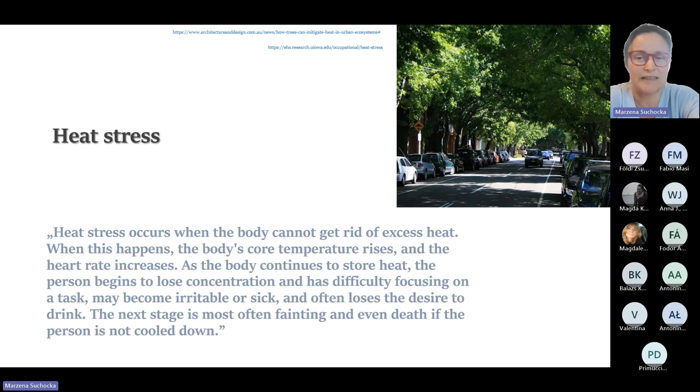Okay, it's working. Heat stress, we experience it more often than in the past. It has some consequences. It can make us weaker. It can make us ill. It can even cause death. It happens because of heat waves in cities.

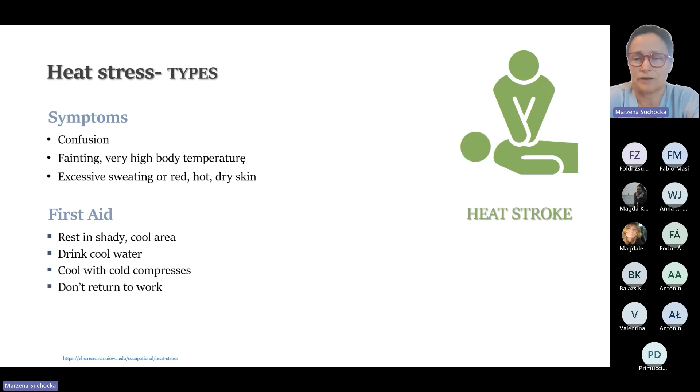The symptoms are from very weak, like just heat rash, and we need to relax, and later we can come back to work. We can have heat cramps or heat exhaustion, but when we have heat exhaustion, it's more serious, and we shouldn't return to work. It's a longer time to recover. The same about heat stroke, and heat stroke could be even a threat of death. So there is a problem.

And the problem is economical, social. It's a problem of our health. And there is some information that could demonstrate the problem. We know that workers have full capabilities at work at 23 degrees Celsius, and their ability to work will be less with higher temperatures. So even when we have 30 degrees, it's like 70% or even less.

And we know that in the shade of trees it will be cooler. I will deliver a lot of details, but for now, just why it happens, how it happens. Trees need energy for photosynthesis. So only 10 to 30% of the summer sun energy is heating the ground. It means that the places close to trees are just cooler.

And there are a lot of studies, but just one example. Walls standing in the shade of the trees could be on average even 20 degrees Celsius cooler.

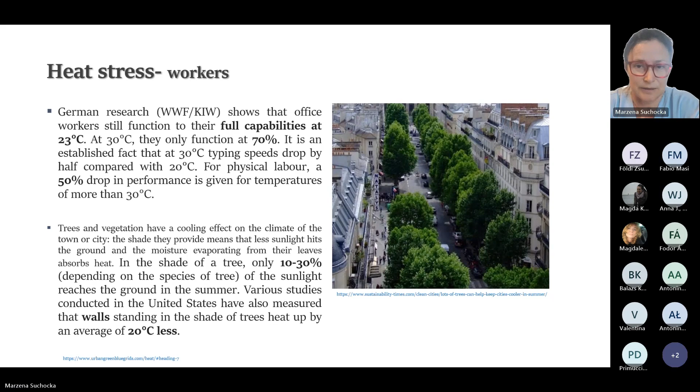What about inconvenience in the city? There are some facts that we are afraid of. We don't need to take Beijing as an example, but we have the same problem in Warsaw, and we are not the hottest city in Europe. But for example, Beijing has 14 additional hot nights even in rural areas, and in the urban areas, it's 26 additional hot nights. And the expectations are that it will be even more.

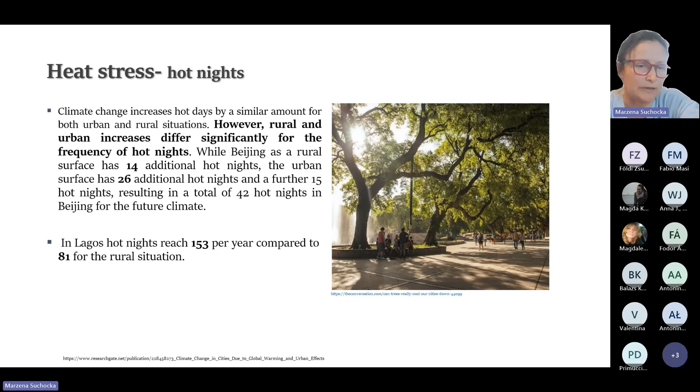From a very long time ago, there were some attempts to mitigate heat island. In Atlanta, when the Olympic Games were planned, there was a problem of energy need for cooling. Organizers were afraid that there would not be enough energy to cool the city for sportsmen.

To prepare the games, they planted 5,000 large trees, trunk diameter like 30 centimeters, and 60,000 smaller ones, trunk diameter like 7 centimeters, and they reduced the heat island by 30%. So it was a real benefit for the city, and that allowed them to organize the games. So trees and vegetation can mitigate air temperature, and I will tell you about that.

The problem is bigger when we are going deeper into the city center. Rural areas are still cooler, but city centers, dense, built of concrete, are really hot. So there is a relation between greenery or lack of greenery and temperature through the day and through the night. So what we are doing now is trying to bring natural processes into the concrete centers of the cities. And I will give you a lot of details about that.

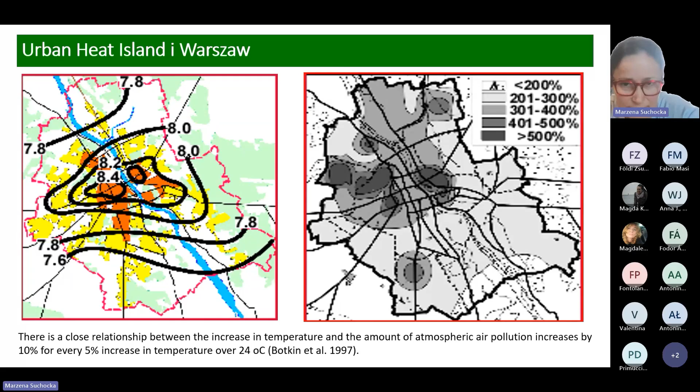And atmospheric air pollution increases by 10% for every 5% increase in temperature over 24 Celsius degrees. So there is strict correlation. From another side, when we are analyzing tree canopy cover, it is a nice factor. We'll talk about it later.

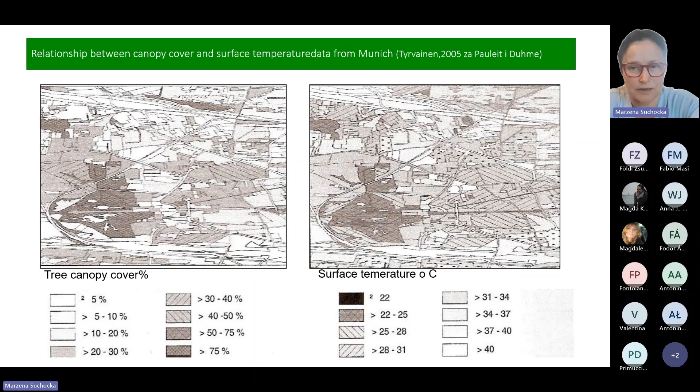And when we are analyzing surface temperature, as you see, there is again straight correlation. So more tree canopy cover means lower temperatures. Even on that easy study, we can see that. How it works: trees are taking temperature, and when we have a temperature like 30 degrees, we will have 40, even 50 degrees on pavements, and we can have thermal comfort just close to trees.

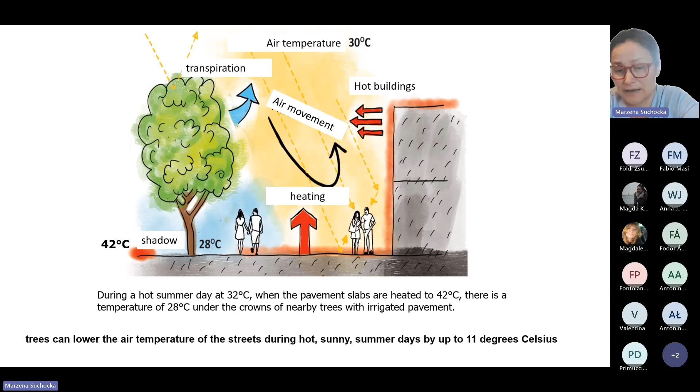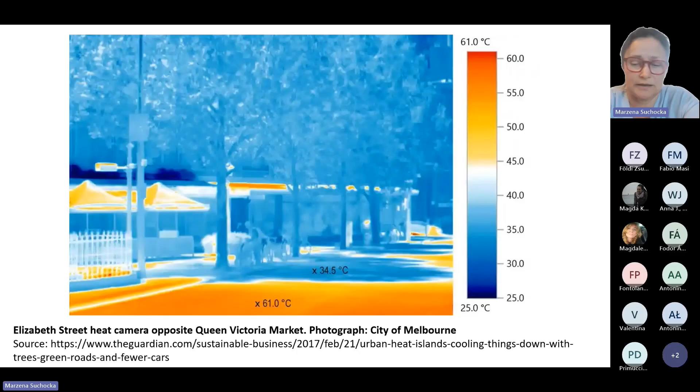And I will show you a lot of examples in the second presentation, how it works, how much it works, which kind of structure, which kind of species are working better. So the difference between close to trees and outside of the trees is 11 Celsius degrees, but it could be much more. And I'm sure more often it's just much more. That is a Melbourne example, where we can see that it is even 20, 30 degrees. So lower temperature in the shadow, higher temperature on the pavements.

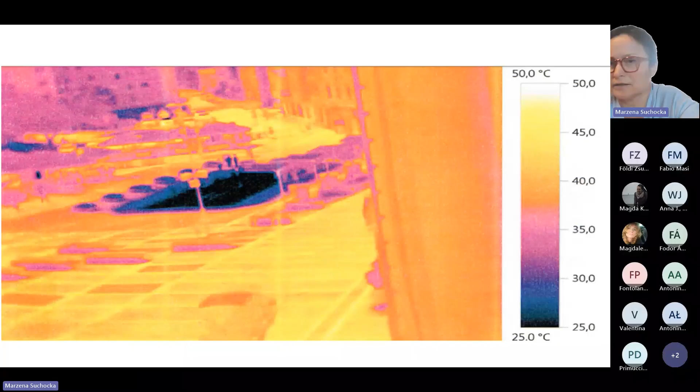That is a normal photo, that is a photo in a thermal camera, and you even see the color of the pavement. So darker pavements are just warmer. That is important. Our little trees in the pots, that by the way are standing in a place where they can't survive, it's really hard site condition for those trees, but those little trees could decrease the temperature like 20 or 30 degrees and bring thermal comfort.

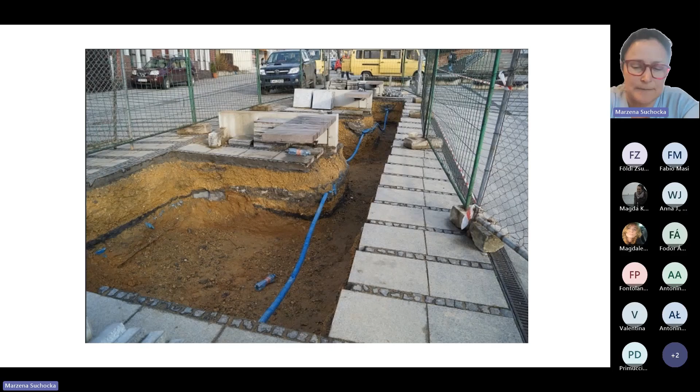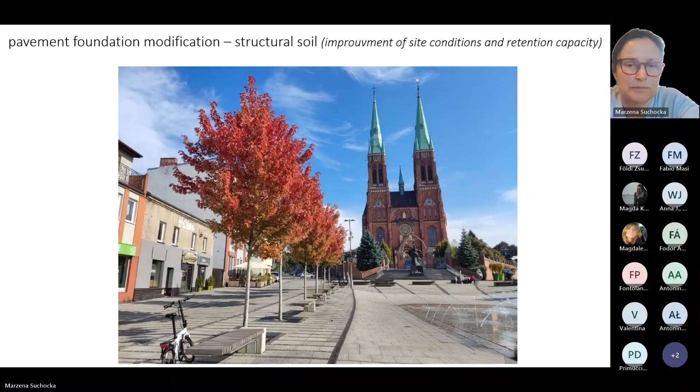That's why we just started to improve the situation. That's what you see here. It's a rebuilding of the pavement. We used structural soil just to capture water, just to organize the place for roots of trees, and we planted trees. It's hard site condition still for trees, but that improvement of the site, I mean structural soil, is allowing the plants to grow, to be healthy, as you see, and that investment was something like 8-10 years ago, and you see the result now.

Still, they are vital, and there is a plan to make more trees to enlarge the plantings, because that improved the situation. Not only thermal comfort, but wind, pollution, and water management. So still we have all functions together. So it's not only one function. We are not only proposing thermal comfort for city dwellers. No, it's a lot of functions at the same time.

Again, some picture that is colored in the autumn, because they are just green trees, and in the autumn they are just like a miracle. People from the city loved it. I still have pictures. That year they look like that. Still very healthy, and they are just working for people.

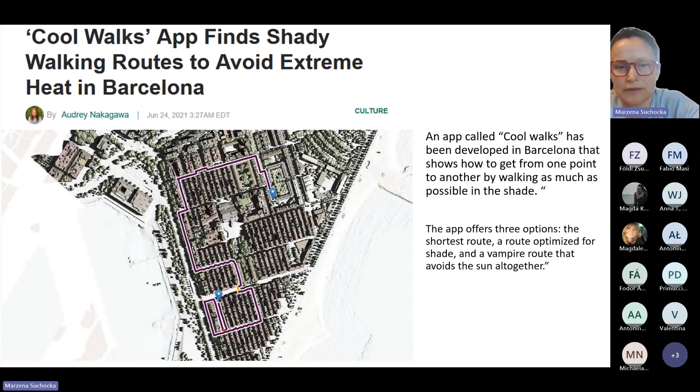So green infrastructure started to be perceived in a different way than before. Before, ecosystem services like aesthetics were the most important. Now we need shadow. We need to improve thermal comfort. We need to manage water. So different needs are priorities.

People were protesting, and in the time of the guarantee, when you finish the project, everything was rebuilt, and big trees were planted, because those little trees are like a temporary plant for 1 year, for 2 years, maybe for 3 years. It's not the plant that will bring us ecosystem services in hundreds of years. That's why people protested, and it was changed immediately.

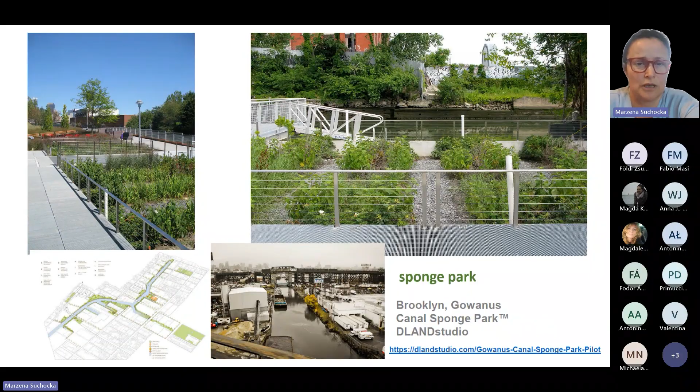So now we are talking about functions of blue-green infrastructure. We are organizing sponge parks. So there is a park, of course it's beautiful as well, but it has functions here. The main function is just retention. We are bringing nature into cities, even temporarily, just to bring ecosystem services.

You see here different layers of vegetation. Later we'll talk about how different layers are more effective in cooling, but in the rest of ecosystem services as well. We have a trend to organize habitat gardens. So we are going in that more natural direction. Natural sets of plants that usually grow together, and so we are adjusting plants to the site conditions. So of course they are beautiful because they should be beautiful.

This is a very important function for people, but they are healthy, they are fast growing, they are long lasting, and they are bringing benefits, or flower meadows. So different kinds of vegetation, and we are talking about retention capacity of flower meadows and so on.

There is a problem of leaves, and I don't know what it is in different countries, but I see a wave of compulsive behaviors. People are trying to clean everything around, and they are fighting with leaves, and we need them. It's called organic matter. It's food for biodiversity in the soil. Without biodiversity in the soil, we are not able to, for example, keep newly planted trees, because that biodiversity is supporting newly planted trees in each time of stress.

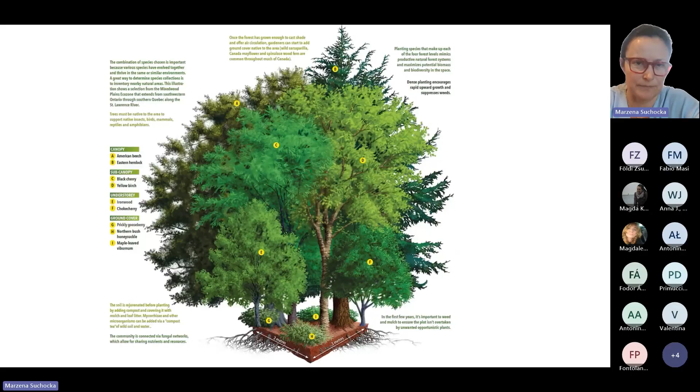Even in the city, it was just a positive social event. Here you have some information, because information is very important. We need to tell people that forest is important, leaves are important, soil is important. We can't damage the tree, we can't damage the soil, because there are millions of organisms. So we are just bringing functions.

The High Line is a nice example of how the functions, the improvement of well-being, were organized by that linear park, and it's really biodiverse. Now it is an icon, a symbol of New York, and people come from all around the world just to see that miracle in a place that was totally damaged, totally poor, without ecosystem services, so the temperatures were really high.

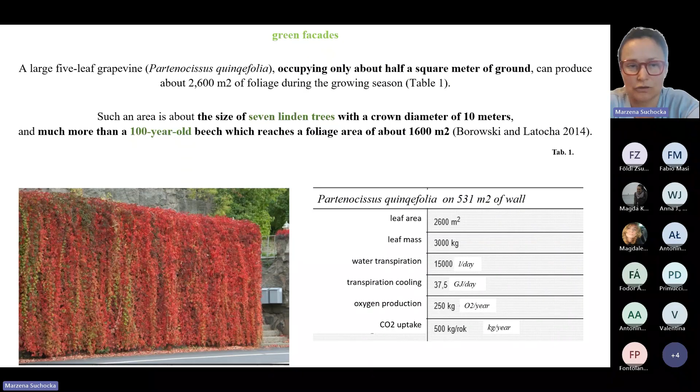So 500 square meters of green wall made of Parthenocissus quinquefolia has water transpiration capacity and transpiration cooling efficiency that we demonstrate in numbers. That is important: we need numbers to put the work of green infrastructure into calculations.

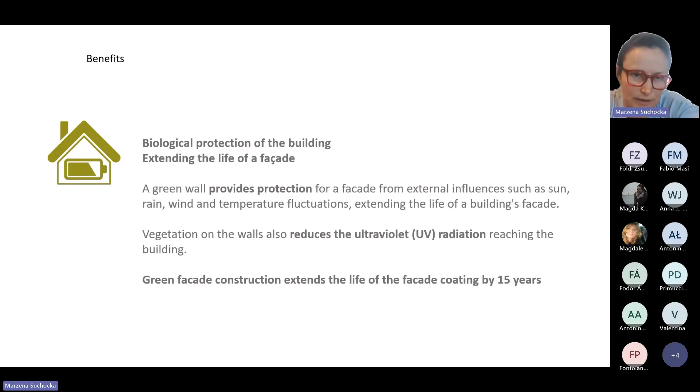The same wall will improve the quality of the wall. The green facade construction lifetime will be extended by 15 years because it takes energy and the extremes are flatter, not so hot and not so cold. That's why the facade will live longer. The same wall will absorb noise; some research says something like 40% of sounds, a reduction of up to 8 decibels.

And the same wall will bring cooling benefits, because 50% of the sunlight is absorbed and 30% is reflected, so air conditioning runs 30% less intensively. That means energy savings, and the average temperature effect is about 3 degrees Celsius, outside and inside: in winter the inside temperature is higher, in summer lower. So it brings energy savings on cooling and heating the building.

Again, I will show you some examples. The United States calculates how the urban forest works for stormwater runoff, and the calculation is a reduction of 2 to 7%. They calculated that investing in green infrastructure is 3 to 6 times more effective in managing stormwater per $1,000 than conventional methods.

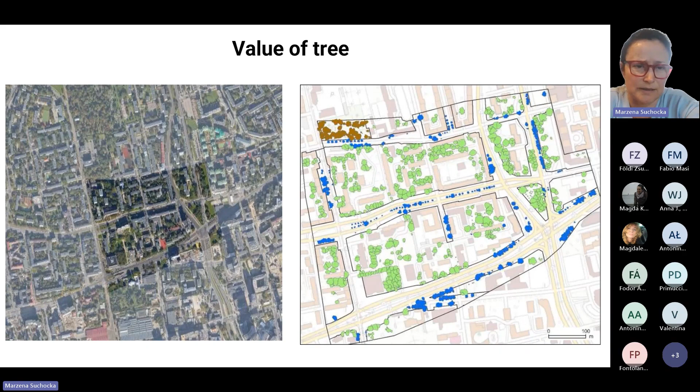We just analyzed, in that case, the air, so all the ecosystem services that are connected with air cleaning, and we calculated them. It's an example because, as I will tell you later, the benefits could be calculated from the point of cooling, but it appeared that 1,300 trees are working for the city, and the value of that work is almost 6,000 euro. And of course, we can demonstrate in the details, but even when we look at PM 2.5, it is worth almost 500 euro per year, but it is almost 10 kilos of PM 2.5.

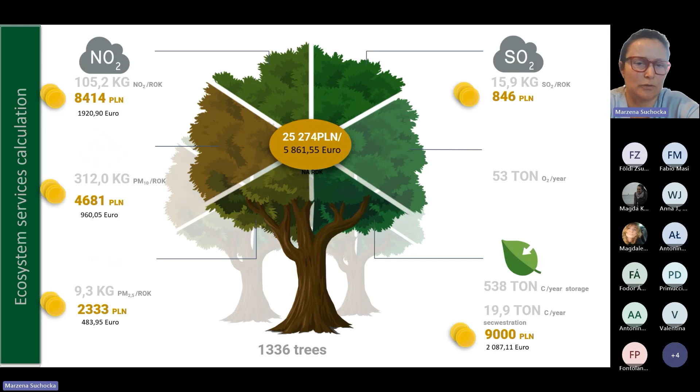It's one of the pollutants that is really damaging for us, and everything is connected. So the trees not only clean the air, but they are also cooling the district, that area. Of course, the higher the tree is, the bigger the tree is, the higher is the value of ecosystem services. And we made here some estimations, like an average, that is really useful later for other estimations or analysis. It could be estimated for the whole city. We just need to have the data.

So our most efficient tree was a populus, and it was something like 16 euro per year, because usually it's just per year work, so each year. But we calculated replacement value as well. I just want to show you the tools that we are using for urban forest management, urban greenery management. One is, as I told before, ecosystem services, so the value of the work each year, which is, as you see, the highest for our tree. It was something like 16 euro. But we also analyzed replacement value.

And those 1,300 trees, it was something like more than 2 million euro value. And it's the value of an asset of the city, yeah? So it's a value like buildings, like roads. Trees are a value, and we can calculate it. Replacement value is perfect for that. And just to show an example, our populus, the most efficient tree. By the way, people don't respect the populus genus. For them it's dangerous and doesn't have value, and that one was the most efficient.

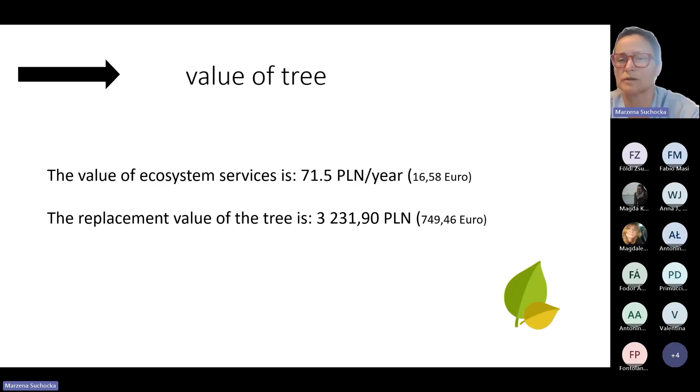Even when we are demonstrating how much it works, how many kilograms of pollutants it's capturing, it's impressive, because what kind of method would we use to have that efficiency, yeah? And we can calculate the ecosystem services value, it's 16 euro in that case, or the replacement value, which is almost 750 euro. So different levels of monetary value, but both of them are important. So we know the value of our fabric, and we know the value of ecosystem services it brings each year. That is just cleaning the pollutants. The whole value with energy savings and water management is like 3 times higher for the tree, more or less.

So we are able in that way to prepare some calculations and have information for discussion. What is worth it, what is not worth it, how we can invest, because each tree is an investment. We are planting it and the value will be higher. That is the opposite of gray infrastructure. When you construct gray infrastructure, the value next year will be lower, and our tree value is higher. So we can calculate the ecosystem services value. It was almost 6,000 euro in that case. We can calculate replacement value. In the case of those 1,300 trees, it was more than 2 million euro. And we have data for discussion.

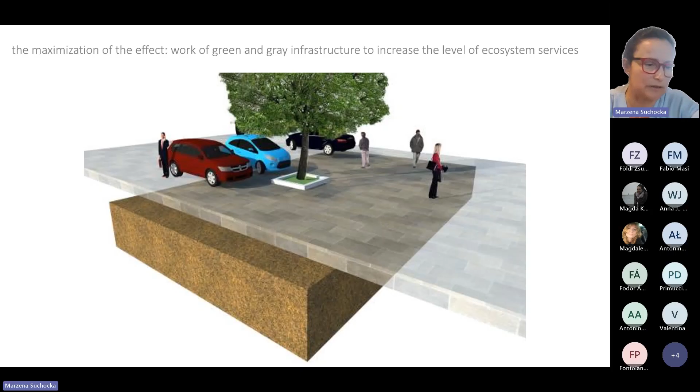So what do we do to improve the quality of green infrastructure? City centers are really dense and covered with concrete, and that concrete must stay. Of course, some of it we can replace with green infrastructure, but some of it is not possible. And that's why we are trying to modify the subgrade of the pavements. In that way, we can have all the pavements, roads, or parking lots that we need, and the green infrastructure that we desperately need now, because if not, we will have a problem. That's why, to not disturb trees, not to damage or cut off trees, we are putting basements under the roads, because those roots will work for us. They'll take water, will transpire, and that transpiration will cool our cities.

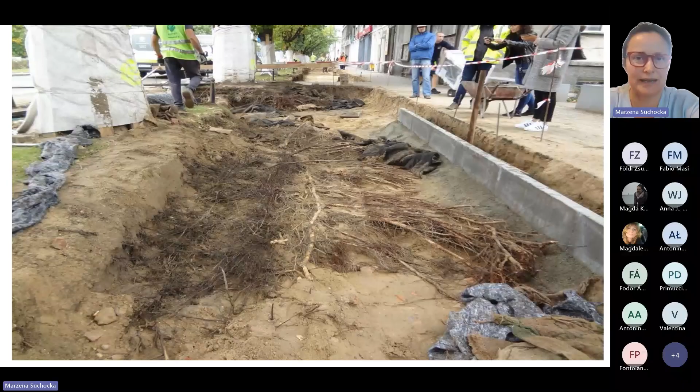So we are combining gray infrastructure as a supporter of green infrastructure. That is something different, because usually gray infrastructure was damaging green infrastructure. That's the way to improve the site conditions of trees, and to allow our investment, an investment like a tree, to live hundreds of years.

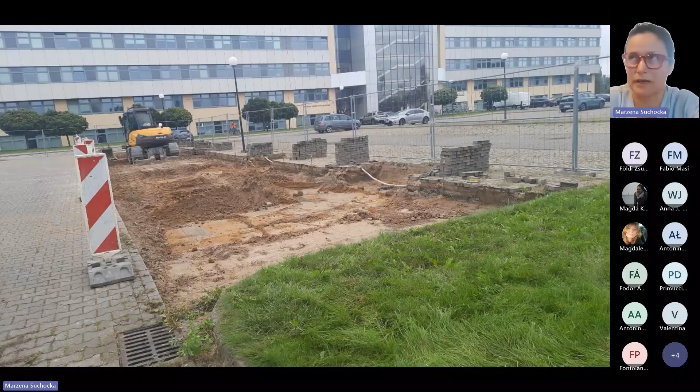That is a place where we have an experimental plot, just in front of my building at the university. We are just examining, collecting data to calculate the efficiency of trees. That is just the preparation of our experimental plot.

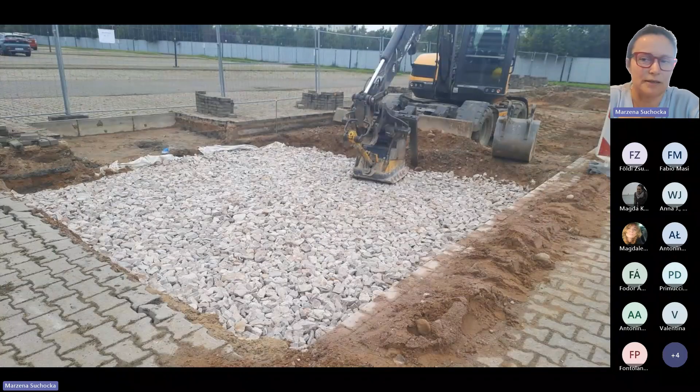You have 3 pits here, and they're like 2 meters by 2 meters, and you have 2 parking lots with structural soil. And it's 5 by 5, so 25 square meters. So both of them, it's almost 13 meters of space for roots. It's the space where we are capturing water, because the subgrade could even be filled with water. We are delivering water from the rain and oxygen to the roots by that little orange device.

And we have a place where ecosystem services came back, and that is connected with concrete. Here we have porous concrete because we wanted to check how it works, and we are just looking for new possibilities. One function that is important for porous pavements is the function of cleaning. So PM 2.5 or 10 go in, and they can be taken by the biodiversity in the subgrade of the pavement. That is the new approach that we are trying to propose in the hardest sites, the most concrete sites, like our parking lots, as you see.

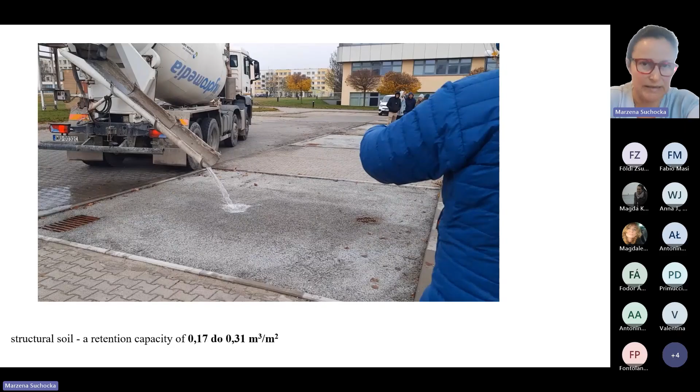And that is something that I want to show you, because we put 2 cubic meters into 2 parking lots, and we were able to manage that water. So it was the infiltration process, it was evapotranspiration, it was transpiration by roots. It will be higher in the future. And now we are just measuring that. And of course, besides the capacity of the subgrade for water management and the potential of cooling, we have the work of our trees. So we can add both things together.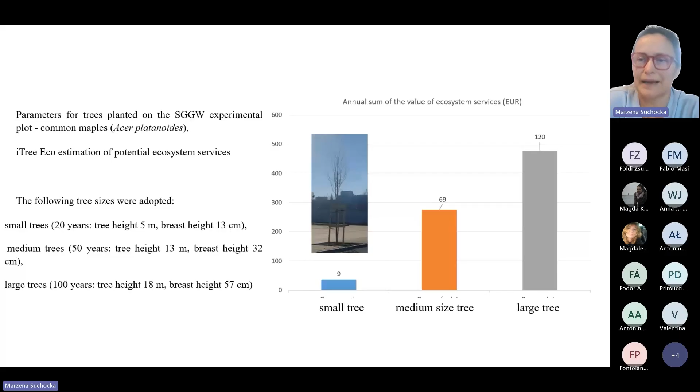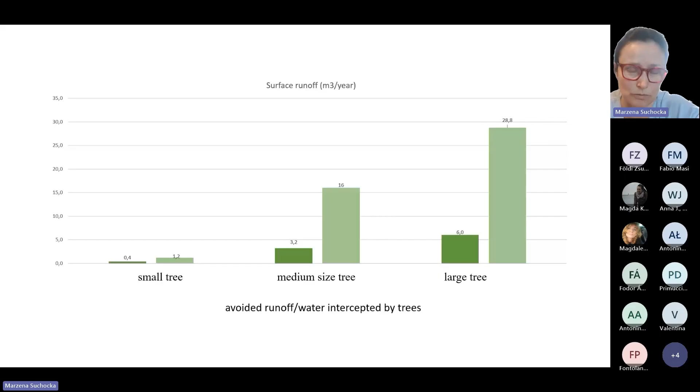Only 3, and additionally, we have the capacity of our grey infrastructure, and being large, because it has nice site conditions, it will be more than 30 cubic meters to capture, to manage. So that will be transpirated, evapotranspirated, that will infiltrate. It will make that place cooler. We suspect that there will be huge differences.

That's why all those dots are sensors. We are just collecting data to know more about heat island mitigation potential, about the differences between our pavement and normal pavement, about the efficiency of trees, the transpiration of trees. We'll use porometers to tell the difference between trees that have access to water, because the structural soil is a source of water for them, and the trees in tree pits, like 2 meters by 2 meters.

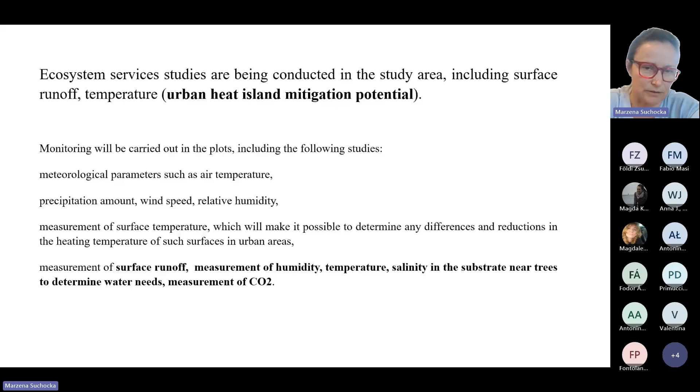So I hope next year I will demonstrate more interesting data about our research. And that is just temperature. So we can see differences between normal pavement and our pavement with structural soil, but we need a little bit more time to demonstrate them. We just need a longer time to demonstrate the results of our study.

So we can use non-typical tools to plant trees in places where they normally, in a standard way, can't survive. It's too hot for them, it's too dry for them, it's just extreme site conditions. So that's why we are using gray infrastructure that could be used for transportation, because it has enough parameters that are good for all kinds of traffic, even heavy traffic.

We have in that subgrade a retention capacity of up to 0.31 cubic meters per square meter of that solution, and we just need to have that modification, because it is improving site conditions for newly planted trees. That's why they will grow into big trees, and a big tree is an efficient tree. We need at least medium-sized trees, because they are working visibly. It's the level of ecosystem services that we need. Of course, the best level is the work of big trees.

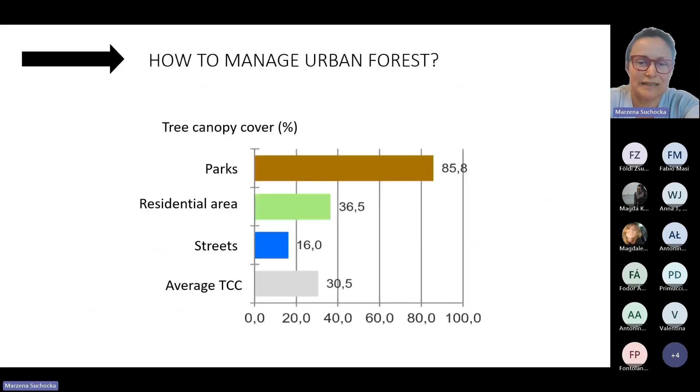And 30% is the level that is enough to maintain thermal comfort, to maintain water management, to slow down runoff. So we need a minimum of 30%. But not only for that, there are thousands of studies, and a tree canopy cover of 30 or 33% is demonstrated as the canopy cover that significantly reduces stress, anxiety, and depression.

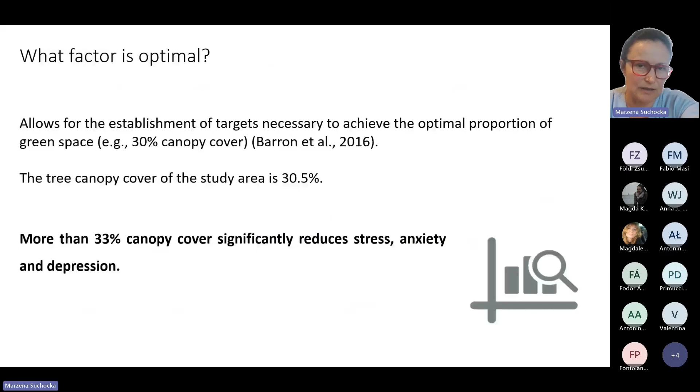So we are talking about heat islands, but the rest, 19 ecosystem services, could be delivered with tree canopy cover of at least 30%. That's why the 3-30-300 rule appeared. That is a discussion with a previous rule by Dr. Frank Santamour, the 10-20-30 rule for biodiversity in the urban forest stand.

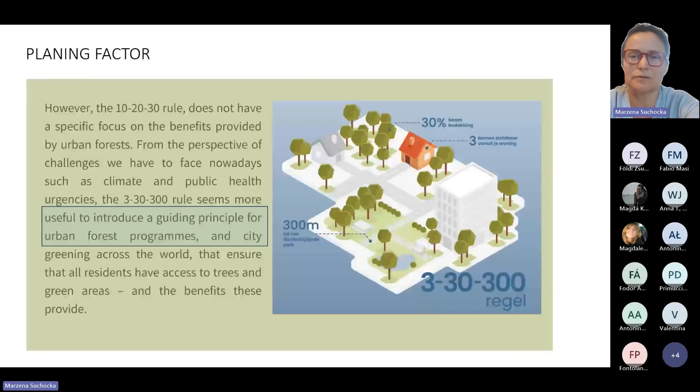And the researchers went further, and what it means is that the functions in the city, the ecosystem services, are at a satisfying level when we can see three trees from the window, when we have at least 30% of tree canopy cover in the neighborhood, and 300 meters to the nearest park or green space. And that is a nice rule because it's really complex. Each number is backed by a lot of studies confirming that that level of saturation with green infrastructure is the minimum that is working. I will demonstrate a lot of examples of that later.

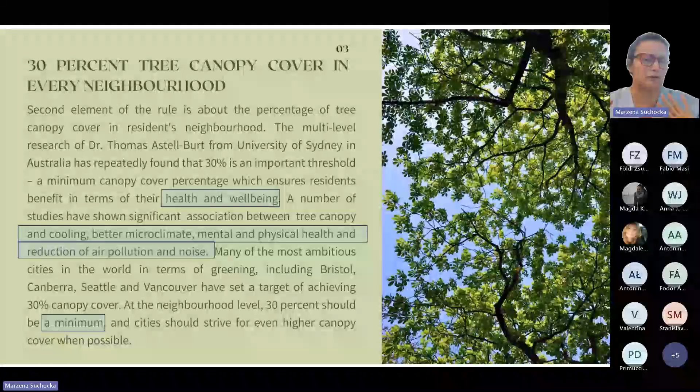So with the three trees, it is better when we have fewer large-size trees than a large number of smaller ones. Of course it could be more, but again, the size has a meaning. About 30%: when there is 30% or more, it's a condition to maintain the well-being of city dwellers in a whole range of ecosystem services. It's physical health, reduction of air pollution, cooling, microclimate, and 30% is the minimum level. It's specific, like a minimum level.

And 300 is the distance to the nearest green area with good quality. What does good quality mean? It could be a size of at least 1 hectare, because that area is efficient, but a size of half a hectare should be set as a minimum. Of course, it's good when there is a system of those kinds of green areas to deliver to city dwellers. So whole cities are checking how it works in their area.

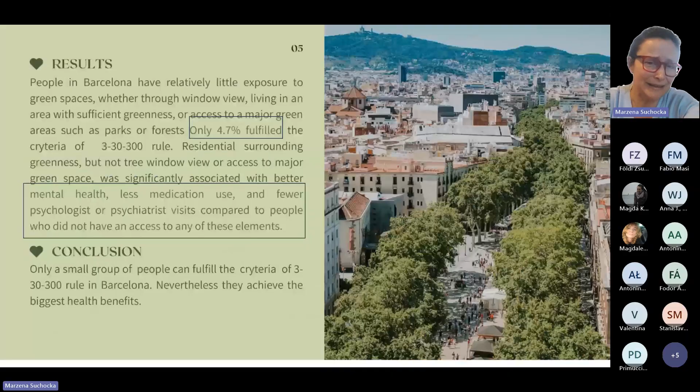Barcelona checked how many people are living in those conditions, and only almost 5% of city dwellers fulfilled all 3 criteria of that rule. And they have the best mental health, they used less medication, they visited doctors less, so their health was better in comparison to the other groups.

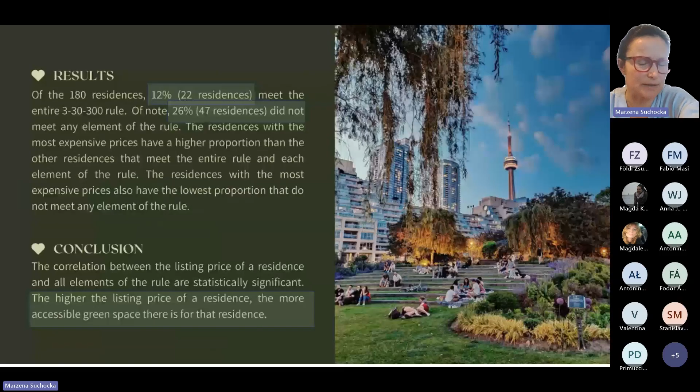About Toronto. Toronto checked the prices of buildings, of flats, and checked if the flats, the places for living that fulfilled our rule, are the most expensive, and of course they confirmed that. In Toronto, 12% live in places where the 3 criteria are fulfilled, but 26% did not meet any element of that rule. And that is a question of social justice, yeah. Just access to well-being, to the places with the best way of life.

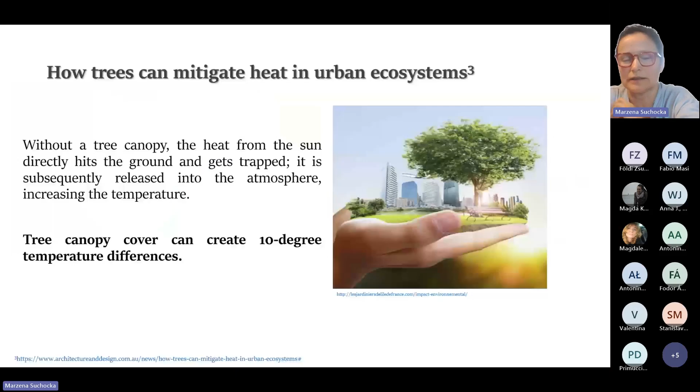If we analyze which criteria were fulfilled, which not, in which situation, that is a nice tool for management. We know where there is a lack of good quality green infrastructure, which districts, which streets, and we can improve, we can manage, we can deliver good living conditions. So this can mitigate heat in the urban ecosystem. Tree canopy cover can create 10-degree temperature differences. I will show you detailed analysis to prove that, and how much greenery is enough.

So even a little improvement, like when we improve tree canopy cover from 20% to 30%, the city that checked it avoided 3% of total mortality. But even a 5% increase in tree canopy cover brings an important result, like 300 fewer deaths. So even in that case we can analyze how it works, because when you have heat, especially heat waves, there are peaks of mortality in the city. A lot of studies are showing that. So that is another very important issue.

So residents with low socioeconomic status experience the highest improvement when we improve the tree canopy cover in the area. So it's quite an easy tool that is a powerful tool for environmental justice.

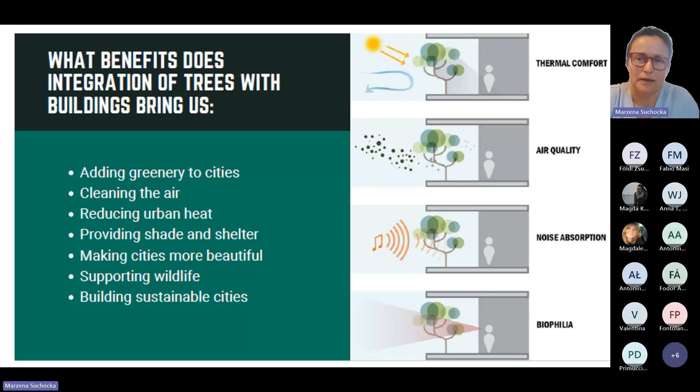species diversity has an impact. Yeah, that is a very important question. I will show you, even not species, but maybe forms. So structure of the green infrastructure, and what urban solutions will increase the effectiveness of trees in heat stress fighting. So just to remember, thermal comfort is one of the ecosystem services. We are experiencing a lot more. We are saying that 20 are connected with trees and 100 just connected with nature. And how it works. So a lot of studies, I tried to choose some nice examples.

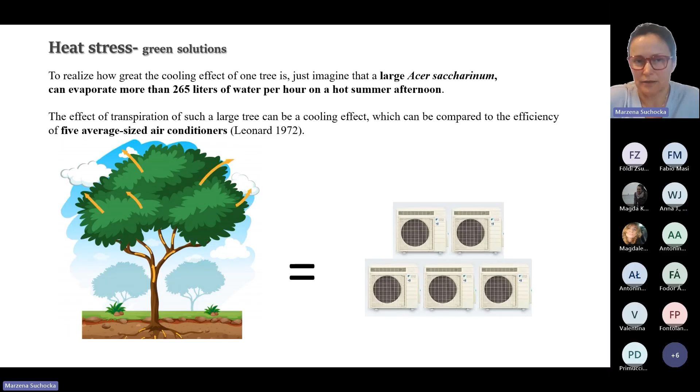From the easiest thing, a large Acer saccharinum can evaporate more than 265 liters of water per hour on a hot summer afternoon, and that is equivalent to the efficiency of 5 average-sized air conditioners. So we are talking about one function, one ecosystem service of the tree that could cool down the temperature. Cities are calculating that work, and very often they demonstrate it as energy savings.

And in London, we have Quercus and Prunus as the most efficient trees for cooling, because efficiency of species is different, as we know now, and that is a reduction of 13% of energy in cities, saving a lot of millions of pounds each year.

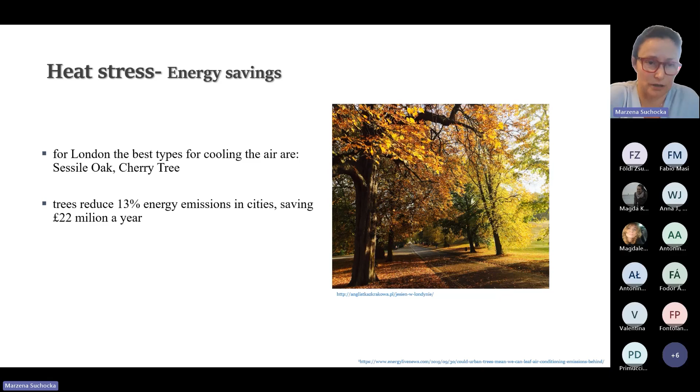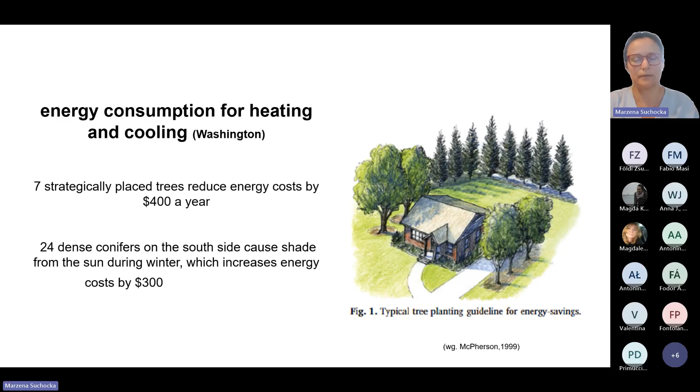How it works, even at the scale of a little house. So when we have 7 strategically planted trees, they can reduce the cost of energy by $400 a year. But when we plant them in a different way, we can even make that cost higher. How does it work?

So when we have conifers, for example, on the north and northwest part of the building, they will block the speed of the wind, and where we plant trees with leaves on both sides of the building, they will have leaves in the summer, so they will produce shadow. They will not have leaves in the winter, so the sun will enter into the building and warm it up. That is the approach that they propose.

And it's really a significant difference when we properly arrange the greenery around the building, not only private buildings, each building, and the reduction of the heating bills, the energy bills, could be even up to 30%. And later I will demonstrate that nowadays it's rather energy savings on the cooling than on the heating. Of course, there are a lot of studies about that.

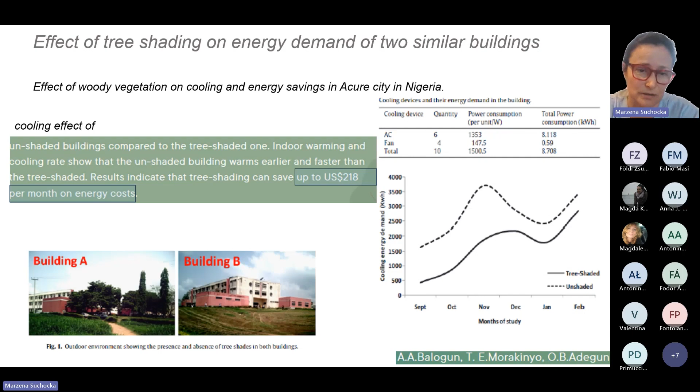There are some scenarios analyzed in that case. So there is a scenario with no trees, the scenario with the current situation that they have, so trees but not very high trees. There is a scenario with higher than building trees, and the fourth scenario is trees that are different species than the current situation. So they tried to assess if changing the species could improve the situation.

So the simulation showed that scenario 2 in comparison to 1 was 10% of savings. In scenario 3, where we have higher than building trees, it was 15%. And when we changed in scenario 4 the trees into, as I remember, Tilia species, it was 12% in comparison to 10% of scenario 2. So we just improved the situation a little bit. So we can improve the situation by size of the tree, but even by species of the tree.

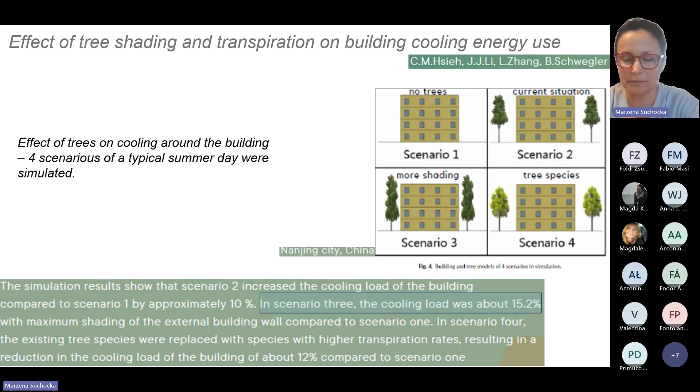That is a nice study about modern buildings with glass facades. We know perfectly that there is a lot of problem with the temperatures. We need a lot of cooling costs in that case, and they organized shelter belts, like trees in shelter belts, and they significantly reduced wind speed, and the energy savings that they recorded were like 18% of the total heat energy cost by those shelter belt trees around a naturally ventilated office with glass facades.

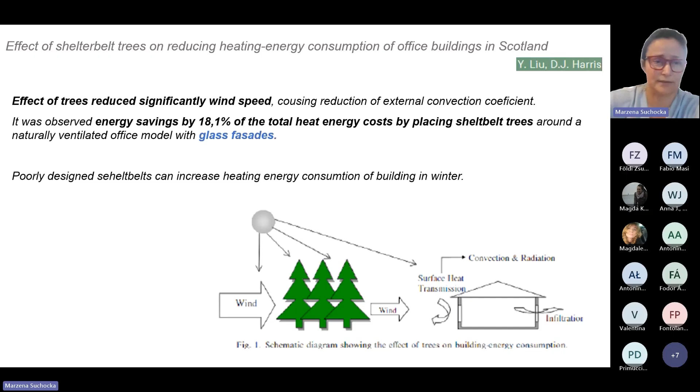Another simulation, how to deal with heat. So these are simulations when we have rows of trees. There are little trees, big trees but close to each other, and big trees but with distance between them, street trees. So street trees decreased cooling energy demand for both buildings that were checked by a combination of shadow effect and lower convective heat transfer. That is important as well. The higher foliar density was important because it was more efficient in radiation blockage.

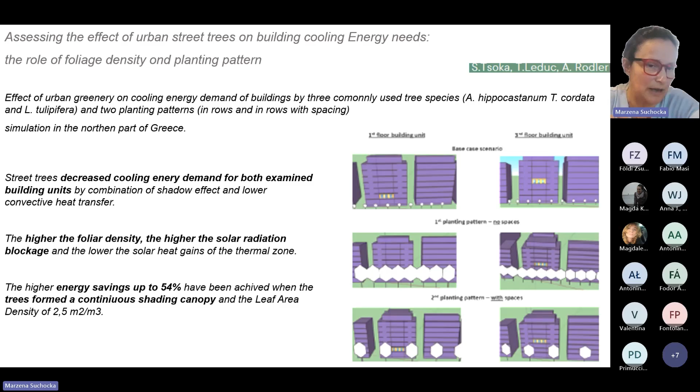And the higher energy savings, up to more than 50%, have been achieved when the trees form a continuous shading canopy. So the continuous shading canopy works in the best way. What, of course, we could suspect, but now we have in numbers that it is up to more than 50% energy savings.

And now a little bit about biodiversity. That is an incredibly interesting topic that started to be analyzed and studied in the last years very intensively. So some examples of how it works.

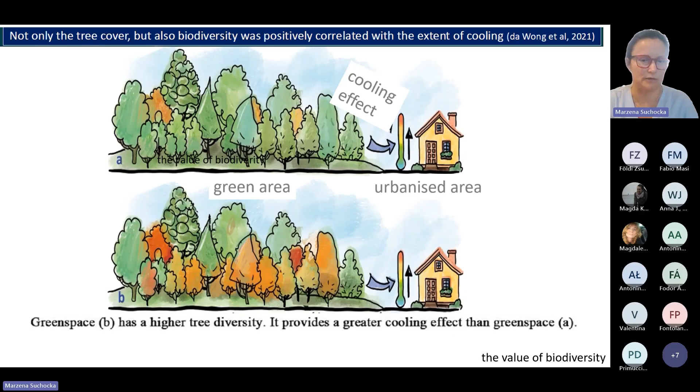The studies show that the same number of trees, the same size of trees, but more biodiverse, has a higher effect on heat island mitigation. So the temperatures will be lower where we have the same structure of the urban forest or park, green infrastructure, but with more species. And some details about that.

So here is the study in California, on California cities, and they analyzed the Shannon-Wiener index. It's an index that tells us about biodiversity. It's possible to calculate it on tree species, and they checked how it works.

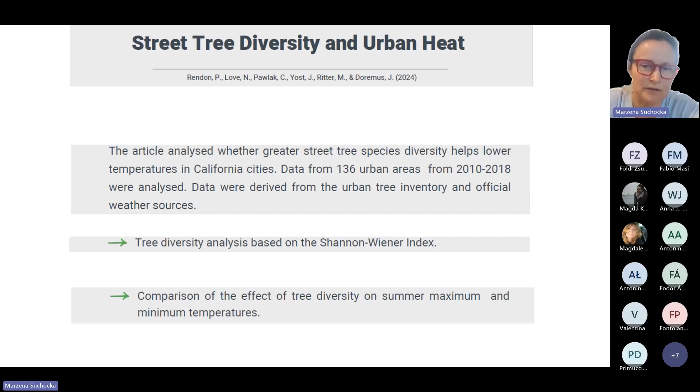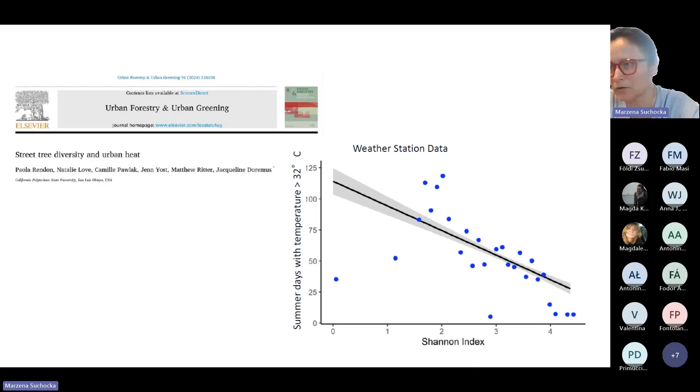So the correlation is really strong. So higher Shannon index, higher biodiversity, you see it here on the graph, is causing more cooling effect. So many species are correlated with more cooling efficiency of our urban forest. And here is that phenomena in numbers.

So especially in hot days, like more than 32 Celsius degrees, in areas with diverse tree cover, 1 unit in that Shannon Wiener index, so more biodiversity in the species, resulted in 15% fewer hot days. Influence on lower daily maximum temperature: 1 unit of the Shannon Wiener index in the tree diversity led to up to almost 2 Celsius degrees reduction in daily maximum temperatures.

It's quite a lot. That effect is independent of total canopy cover, demonstrating that biodiversity itself plays a role in cooling. So we don't need to increase tree canopy cover so much, but just change the set of species and we'll get the result.

Warmer night temperatures. One unit in that index of biodiversity is correlated with up to 0.6 degrees Celsius increase in minimum night temperature. Diverse stands reduce temperature fluctuation. So again, the same like with green facades. We don't have extreme situations.

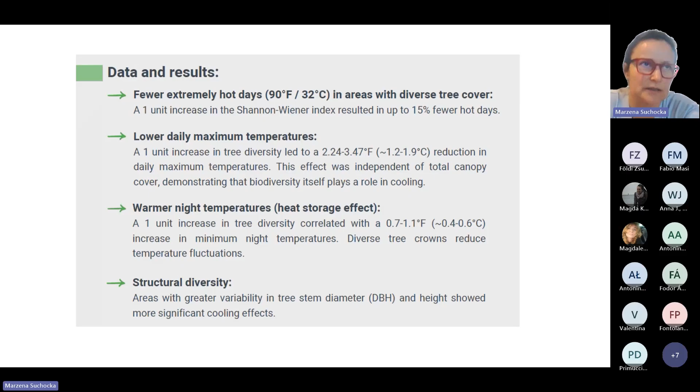So what is important? Especially at higher temperatures, like more than 32 degrees Celsius, we will have the maximum effect of green infrastructure through biodiversity. Areas with higher tree diversity had cooler days but warmer nights, suggesting an insulating effect. Species diversity may increase the ability of trees to cool cities, regardless of the amount of tree cover. So just the species diversity is important.

Diverse tree stands can be a key tool in city planning strategies to help adapt to climate change. So again, we have some tips, some information, how to implement that in urban planning to mitigate the heat island. That is again a study of how it works with high tree canopy cover, when we have high vegetation, a situation like 90% tree canopy cover.

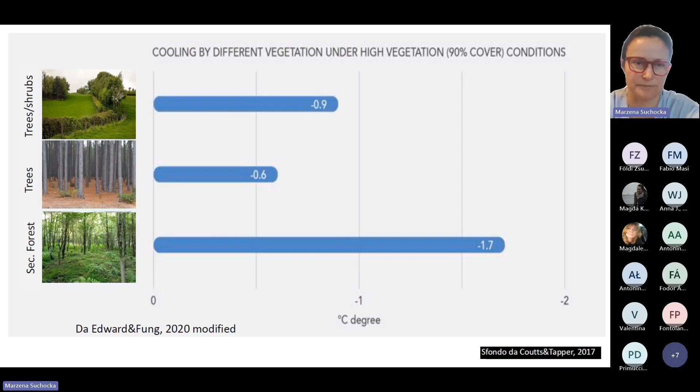So it appeared that when we have trees and shrubs, the effect is decreasing the temperature by minus 0.9 Celsius degrees. Trees in a production forest, so one layer, only 0.6, and rich forest, so regular forest, the efficiency is minus 1 and 1.7 Celsius degrees. So again, biodiversity of forms and species is the most efficient. That works from different sides, it is resistant to different aspects.

For example, storms; we have extreme weather conditions very often in the cities. So a species-rich forest is more resilient after storms. Functional diversity improved resistance and recovery, especially in extreme climates. Forests with conservative species were more resilient but slower to recover than fast-growing species. That is very important. We got used to native species.

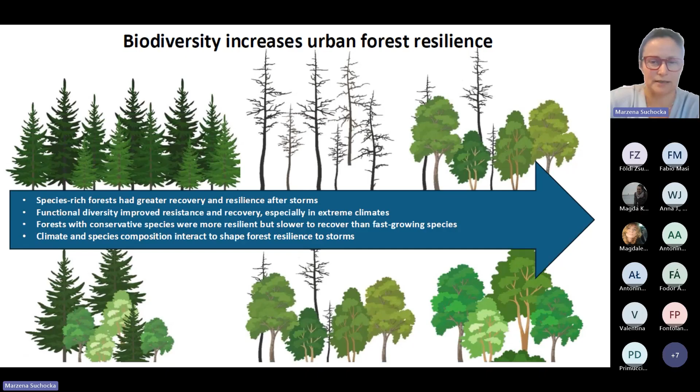Very often we are suggesting to plant native species in cities in Warsaw, but it seems that changing conditions suggest to us to use more species, because we have changed conditions. So we have extremes in our cities. That is a new aspect that started to be discussed in research. Climate and species composition interact to shape forest resilience to storms. So that is again a nice study.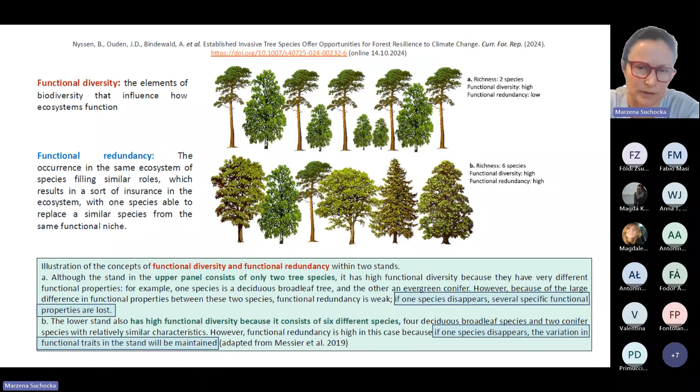That is another nice study that analyzes how it works at urban, neighborhood, local and individual scale. And what did they check? They found that increasing tree cover from 20 to 50% reduces surface temperature in the case of mixed forest patches by up to -3.4. When we have shrubs and grasslands, only -3. And when we have mixed forests and grasslands, up to -3.47. So the most efficient is not only mixed forest patches, but mixed forest with grasslands will work in the best way.

The best cooling effect occurred when vegetation patches are larger and clustered, so close to each other, so that connectivity is important. Patch shapes: when the patch shapes are compact, like 1 hectare, or complex, more than 1 hectare, depending on size. So the complexity of patches is important as well.

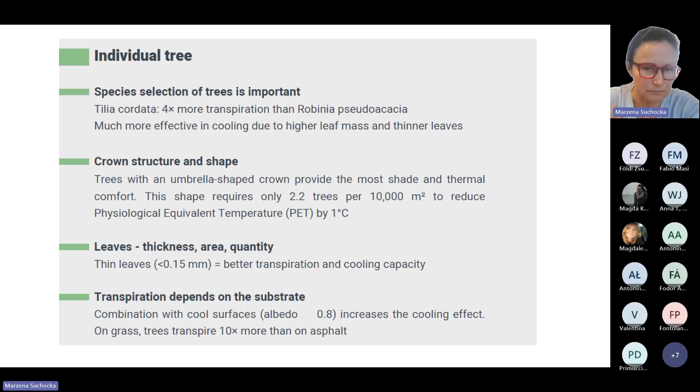Transpiration depends on the substrate, and that is one conclusion I want to add something to. So, of course, a high albedo factor is beneficial because it will reflect the energy. So they conclude that combination with cool surfaces increases the cooling effect. On grass, trees transpire 10 times more than on the asphalt. So albedo. But that is the study we are already doing: when we have water in the pavement, to check if the efficiency of cooling will be high, and how it compares to a higher albedo factor. So a lot of things to put into that strategy of how to organize the city.

So the effectiveness of cooling depends on the scale of the space being analyzed. The smaller the scale, the greater the importance of plant features. That is important. Trees can reduce air and surface temperatures by up to 7 degrees Celsius, depending on their type, distribution, and surroundings. Factors affecting cooling include crown cover, height and density, species diversity, climatic conditions, and substrate type.

That water in the substrate, in the soil or, let's say, in the pavement, as I told before, could be crucial, and we can measure that. So we'll do that for sure. That kind of study I couldn't find for now in the databases. The best results come from diverse, multi-layered, and well-planned urban greenery.

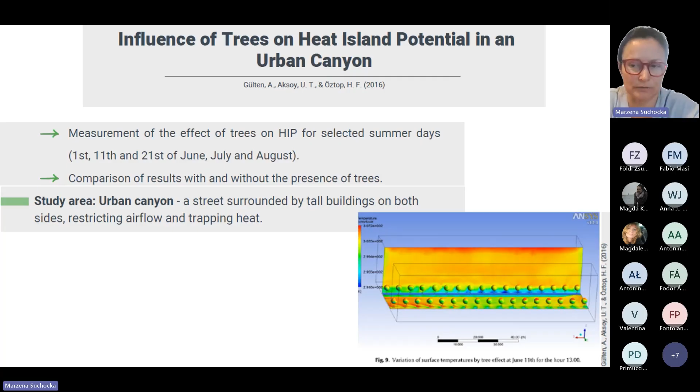A little bit, I have a few minutes more, about canyons, because researchers checked urban canyons. So as I told before, very narrow streets and very high buildings. This is the definition of canyon. What did they find in canyons? They checked the situation without trees and with trees in June, July, and August, and you see the difference with trees. Without trees it is 11 degrees Celsius, with trees in June, almost 5. In July the effect is the highest, 13 degrees.

Without trees, and minus 2.25 degrees Celsius with trees. It means that temperature is lower than air temperature. And again, in August, 12 without trees and almost 6 in the canyon with trees. The maximum pavement temperatures without trees were 52, 53 degrees Celsius. It's a high temperature, so it's quite a difficult situation. They found a temperature reduction potential of 10 to 15 degrees Celsius, and the best cooling effect was observed in the afternoon, around 15 to 17 p.m.

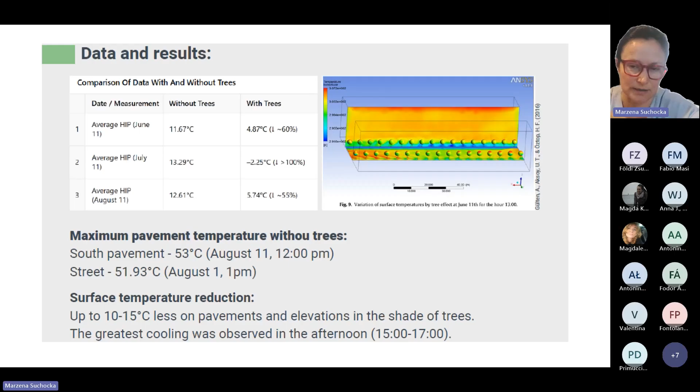You will get the presentation, so this is just the comparison of the canyon with trees and without trees, and as we see, the differences are visible in street temperature, roofs, facades, and so on. So just to analyze.

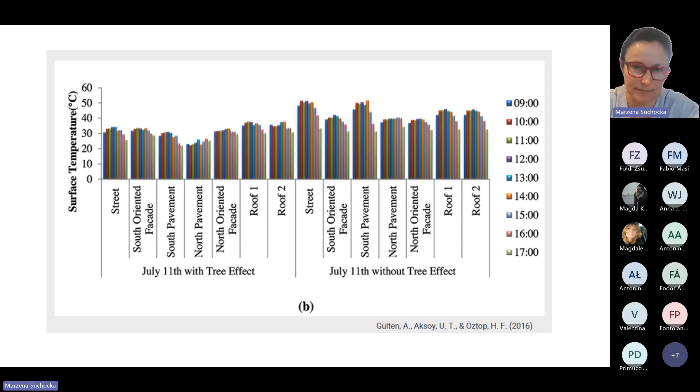Convection topic is important. So they found the difference in situations with trees and without trees, on roofs and on pavements. It's about radiation; those numbers demonstrate radiation. There was a significant influence on cooling in the topic of convection, but in general, despite that reduced convection, temperatures were generally lower in the presence of trees, so there was less need for convective cooling. So in general, it was just a colder, not so hot situation.

So trees can significantly reduce the heat island, up to 60% in June and August, and even the most in July. We are talking about a situation in canyons. The effect of trees on cooling depends on wind conditions. We can analyze the speed and directions. The greatest temperature lowering was recorded on pavements and building walls near trees. Roofs and upper parts of buildings have less cooling effect.

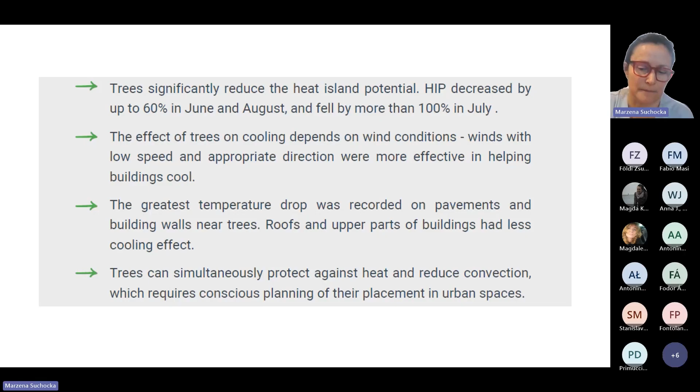And you see, all the information that I'm talking about today is now like puzzle pieces falling into place. We had that study about what will happen when trees are higher than buildings, and we had the information about temperature in other studies. So that is just a picture of the whole situation, all variants of the situation. This can significantly protect against heat and reduce convection, which we need to analyze and put into the strategies of the cities. Maybe something about other studies, just to finish.

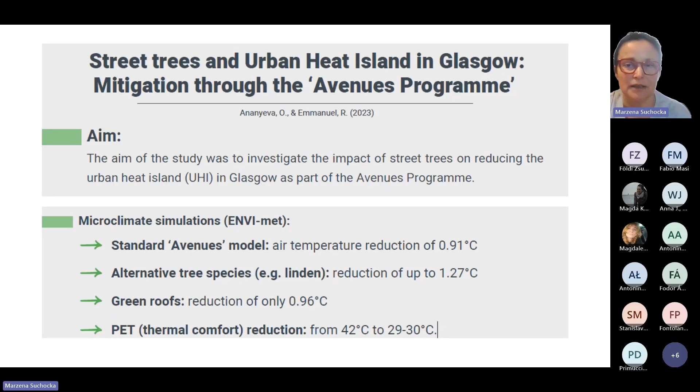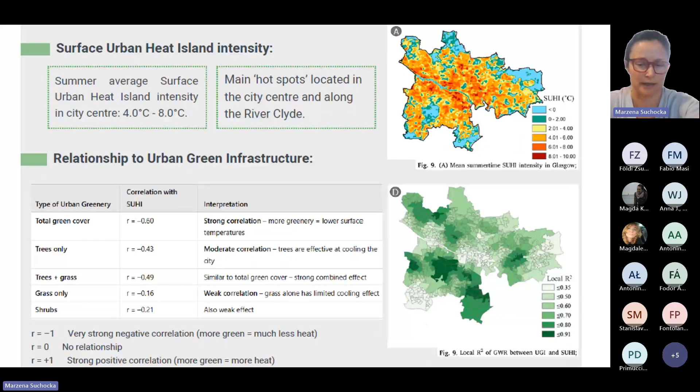They checked different situations at the scale of the whole city, and they found that total green cover is correlated strongly, like minus 0.6, a strong correlation. More greenery means lower surface temperature. Trees only are a little bit lower, so a moderate correlation. Trees have an effect, but not as much as total green cover. Total green cover means trees, shrubs, everything covered. Trees plus grass, two forms of cover, is minus 0.49. Grass only is minus 0.16, weak correlation, and shrubs minus 0.21, also a weak correlation. So the most efficient were total green cover, very intensive greenery, or trees plus grass, followed by trees only. So we have here what works in the best way.

So experiencing such a huge heat island effect in Glasgow, trees are the most effective element of green space in reducing surface and air temperature. Cooling effectiveness is greatest with canopy cover in the 50 to 100 meter range, small isolated patches. So little patches, like 50 to 100 meters, isolated, but when they are isolated, they are not ineffective. The Avenue program, because they have an Avenue program, can significantly improve thermal comfort in the city center by reducing temperature extremes, and the selection of species.

Again, they are proposing tilia, for example, because we need biodiversity of species. So we need to know which trees are the most efficient in transpiration, and more or less we have some tips on how to find them, what the set of species is, and the replacement is very important. They can improve cooling efficiency by up to 40% more compared to other trees. So when we change species, we can be even more effective. It's a similar conclusion to previous studies.

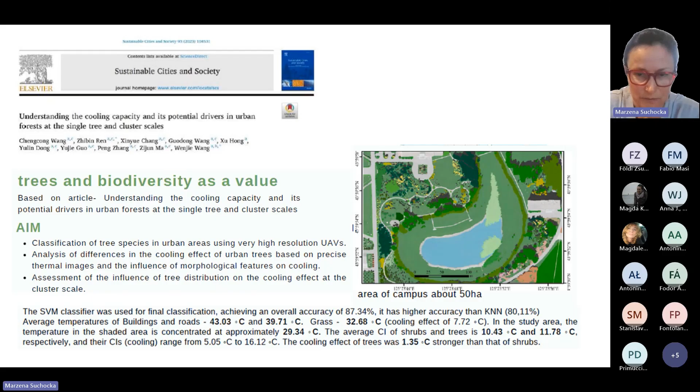And the cooling effect of trees was 1.35 Celsius degrees stronger than that of shrubs. And now that is a list of factors that we can use in analysis. I really like that paper.

So what about the morphology and cooling effect? What is important? Important is trunk diameter, tree height, tree crown thickness. And an increase in each of these parameters leads to the increase in cooling intensity by 0.5 Celsius degree. So when we have average trunk diameter higher by plus 3.64 centimeters, it means that the cooling effect is higher by 0.5 Celsius degree.

About tree height, plus 1.82 meters gives 0.5 Celsius degree. About crown diameter, plus 0.85 is causing on average 0.5 Celsius. About crown thickness, plus 1.3 meters. And again, leaf characteristics and cooling effect, how it works.

Cooling is increased by 0.5 Celsius degree with an increase in NDVI, vegetation index, by 0.02, a decrease in leaf brightness by 10 units, and a reduction in leaf thickness by 0.03 millimeters. So you see, really nice parameters just to check in an analysis and to assess the cooling effect.

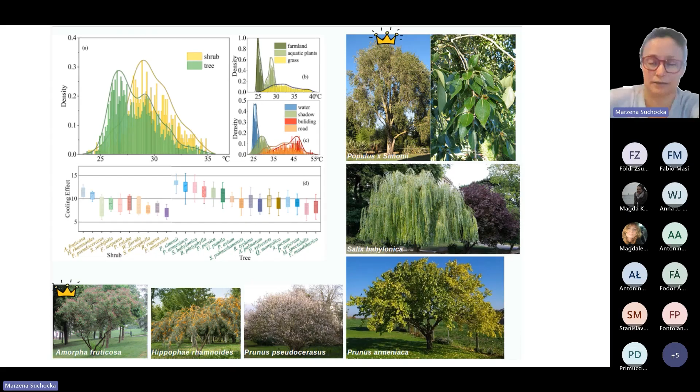So even without deeper investigation and research, you have some information on what is the most important. Amorpha fruticosa was the most efficient shrub in that set of species that they found on the campus. Of course, different species exist.

And just to finish, trees have a much higher cooling effect than shrubs. We know how much. The tree species with larger crown diameter, thicker canopy, and thinner and darker leaves would have higher cooling intensity. The spatial distribution of tree species at the cluster scale is important for increasing the cooling intensity.

When the tree canopy coverage is larger than 40%, the cooling intensity had no more increase, or is increasing on a not significant level. Aggregation, connectivity, and diversity of tree species and a certain threshold should also be considered to produce a better cooling effect.

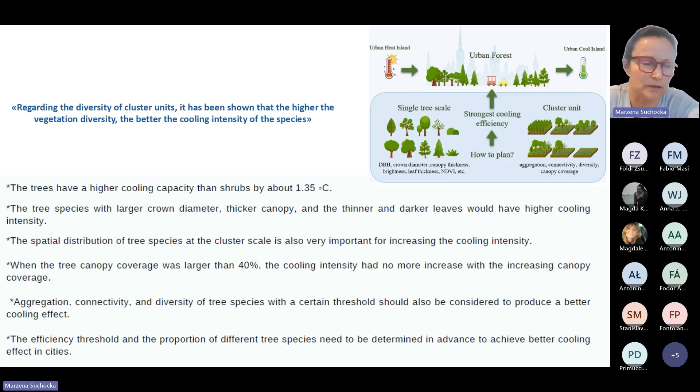The efficiency threshold and the proportion of different tree species need to be determined in advance to achieve better cooling effect in the cities. So we have a lot of information. That is something, a little, 2 or 3 more.

And the last slide. So the characteristics of green spaces that are efficient in cooling. Forest and large green spaces have a higher cooling effect than parks and small green spaces, and irregular shape improves cooling for large but not for small green spaces. Again, nice information on how to get the biggest cooling efficiency.

About characteristics of leaves. Specific characteristics of tree species can affect surrounding temperature, and leaf type and leaf thickness are examples of features that we can analyze. And groups of trees can affect surrounding temperature variation. An example of the variation is the height of trees, with higher variation increasing the cooling effect of parks.

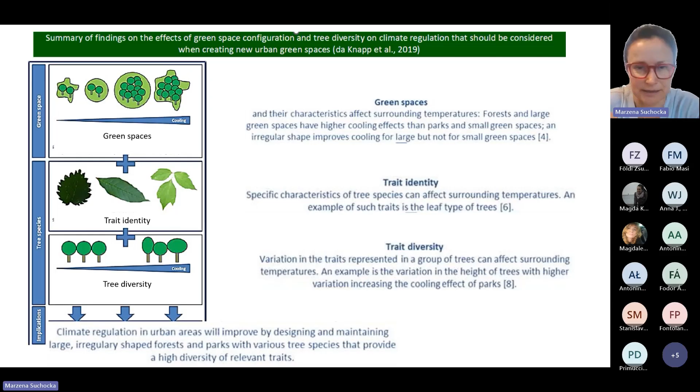Height of trees, but there is a set of features that we analyzed before that can help us, not only height, but a lot of information said before. So that is just the efficiency for urban heat island mitigation. Each city is different, each situation is different, each district is different, even street. So I suppose that having that kind of set of information, we can prepare strategies for cooling the cities.